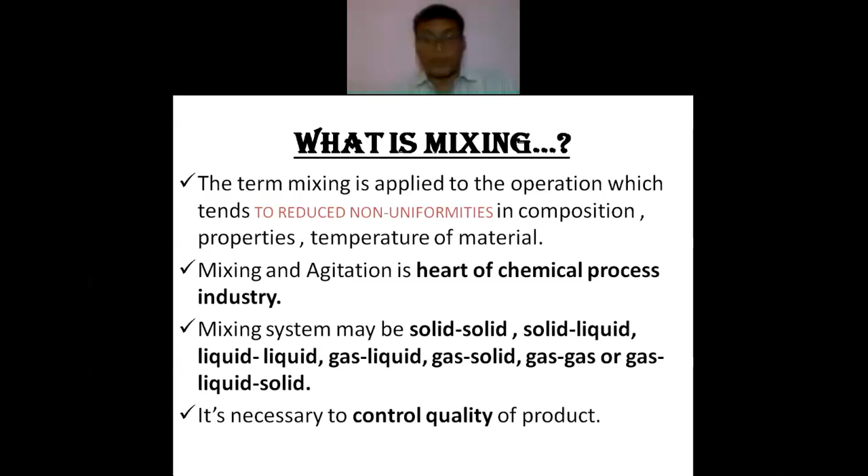Then we add the terminology of agitation to that. Now there is a difference between the mixing and agitation. Mixing is a process, agitation is a means, agitator is a means. An agitator is used to mix the different phases. So mixing is a process. As a result, you get a good uniform mixture. So that is the basic difference between the agitation and the mixing.

Agitation, you require an agitator, and in the process of mixing, once you agitate, you get a mixture. So agitation is a means whereby mixing of phases can be accomplished, and by which mass and heat transfer can be enhanced between the phases or with certain external surfaces.

In its most general sense, the process of mixing is concerned with all combinations of phases, of which the most frequently occurring ones are: the gases and gases, they can be mixed. Gases, when they are mixed into the liquid, that process is called a dispersion. Then the gases with solids, it's a process of fluidization. You make the solids move in a fluid-like motion with the energy supplied with the gases. Then it is also associated with the pneumatic conveying and drying of the solids.

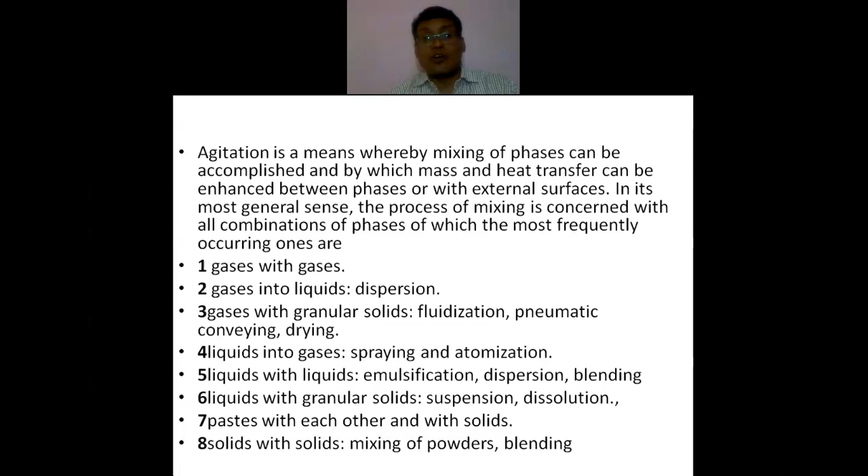Then fifth one, liquid with the liquid, you can form an emulsion, you can do the dispersion, blending. Then liquids with granular solid, it can be the suspension or dissolution. If it's an immiscible solid and liquid, it will form a suspension. And if the solids are soluble into the liquid, it is a dissolution. Then paste with each other and with the solids, a pseudo homogeneous liquid is formed. Then solids with solids, it's a mixing of powder, or it can be the blending of polymers. So these are the different operations which require the processes.

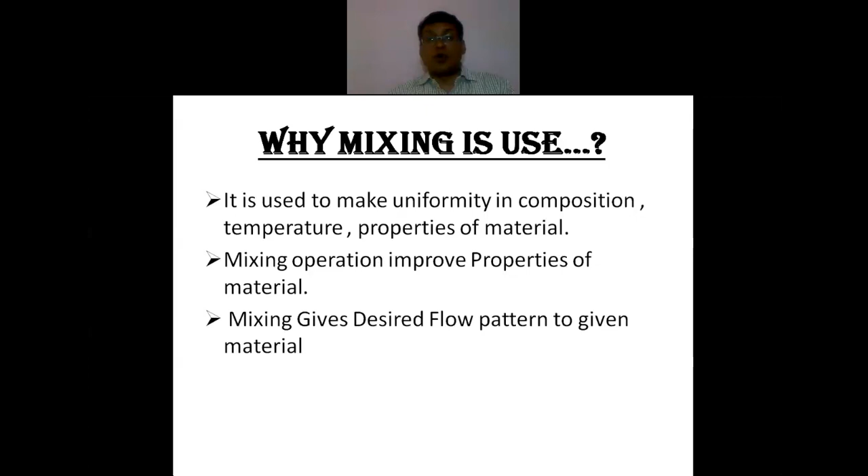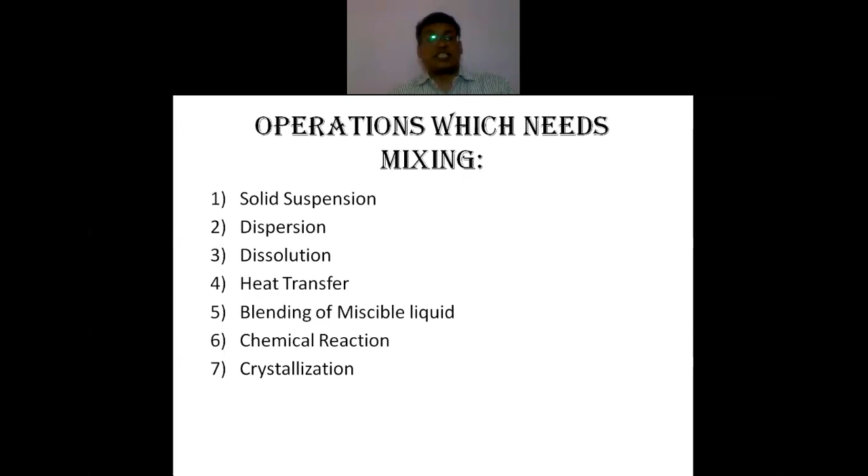Then when mixing is used, it is used to make uniformity in composition, temperature, properties of the material. Mixing operation improves the properties of the material, and mixing gives the desired flow pattern to the materials. So one by one we'll understand these different operations associated with the mixing processes: suspension, dispersion, dissolution, heat transfer, blending, chemical reaction, crystallization. All these require the process of mixing.

So a good mixing system should have the following characteristics. First is the minimum power requirement. Whatever the process of mixing or how efficient that mixing operation should be, that will basically depend on your minimum power requirement. That means it should be the best economically possible.

And when you talk efficient mixing in the optimum time, that means with the minimum time or the desired time, you should get the uniform composition throughout. Efficient mixing means the uniform composition is expected throughout the mixture. Everywhere the concentration will be the same. That means the efficient mixing.

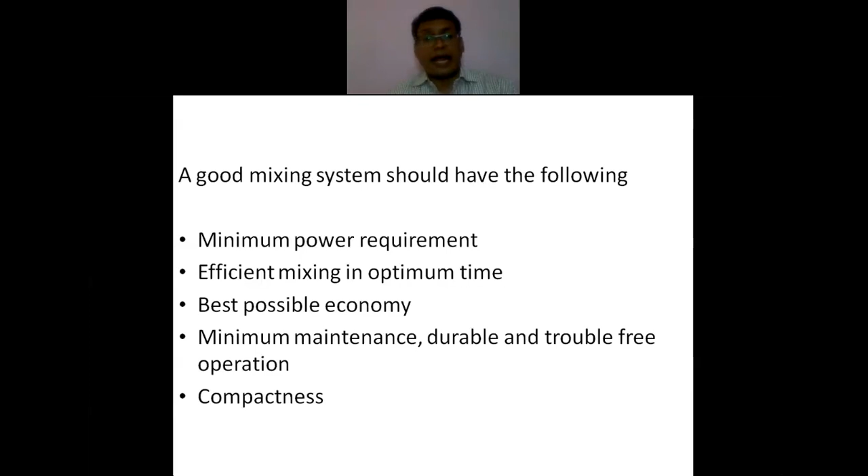The minimum maintenance of all your mechanical parts, then its durability and trouble-free operation. Then the unit should be the compact one. So these are the basic requirements for good mixing. Out of that, this minimum power requirement is talked about everywhere. The rest of the things, that is economy, maintenance, are more or less fixed cost. Minimum power requirement is more focused towards the running cost. And in these mixing operations, the power required is the most important thing to be considered for calculation.

Then the first process is solid suspension. Now it's a physical mixing operation basically, and this involves liquid and solids, but the solids are immiscible in the liquid. That means suspending fine solid particles in a liquid, as in the catalytic hydrogenation of liquid, where solid catalyst particles and hydrogen bubbles are dispersed in the liquid. So this hydrogenation process incorporates the gas, that is the hydrogen bubbles, and solid catalyst particles, nickel, and they are dispersed in the oil. So that is the hydrogenation process that is taking place.

Second example, a slurry of uniform composition having the particles in suspended form is to be prepared. Now you will perform one of the experiments of sedimentation in your solid fluid operation. There you take a calcium carbonate solution. That means the calcium carbonate is dispersed, suspended into the water. First you will stir it with the help of a glass rod to get a uniform slurry, to form a suspension. When you stir with a glass rod, the calcium carbonate will be uniformly distributed into the water to form a slurry. That is nothing but a suspension. And if you keep it for a certain time, it will get settled. That process will be the sedimentation process.

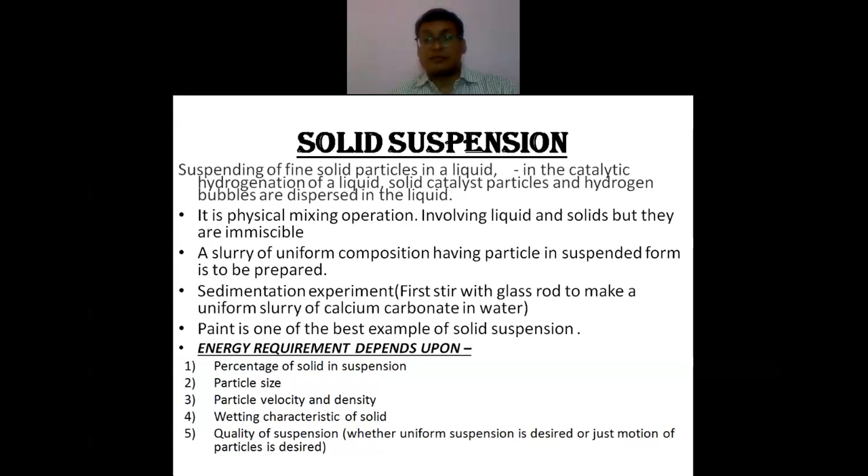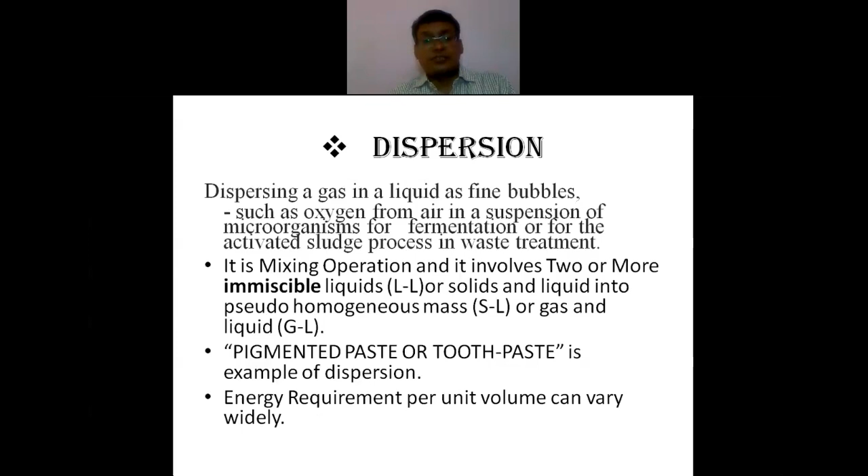Then second, it's a process of dispersion, dispersing a gas in a liquid as fine bubbles. So it can be gas-liquid. It can be a liquid-liquid process also, that means two immiscible liquids. Then it can be solid and liquid, like your toothpaste, pigmented paste. That is the pseudo homogeneous mass that will be formed. Dispersing a gas in a liquid as fine bubbles, such as oxygen from air in a suspension of microorganisms for fermentation or for the activated sludge process in wastewater treatment. The energy requirement per unit volume can vary widely.

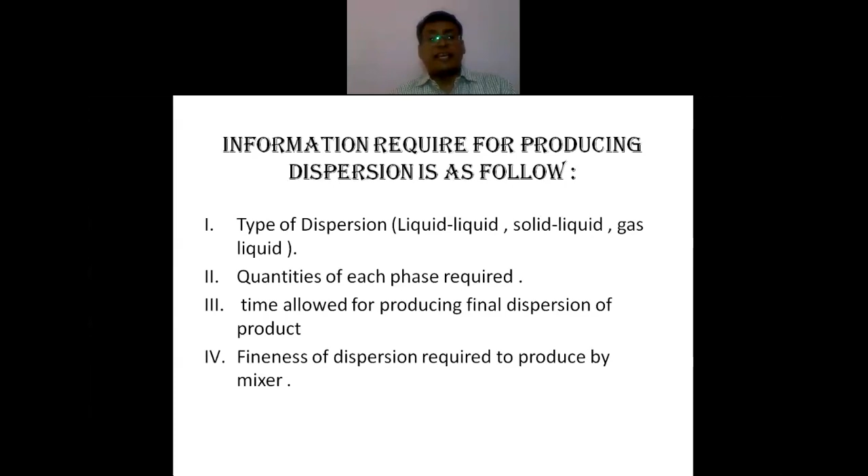Then the information required for producing the dispersion is as follows. The type of dispersion, that is liquid-liquid, solid-liquid or gas-liquid dispersions. Then the quantities of each phase required, the time allowed for producing the final dispersion product, then the fineness of dispersion required to be produced by the mixer. Hydrogenation of oil is the important example of gas-liquid dispersion, or the air bubbles passed into water where the microorganisms are available either for fermentation or for wastewater treatment.

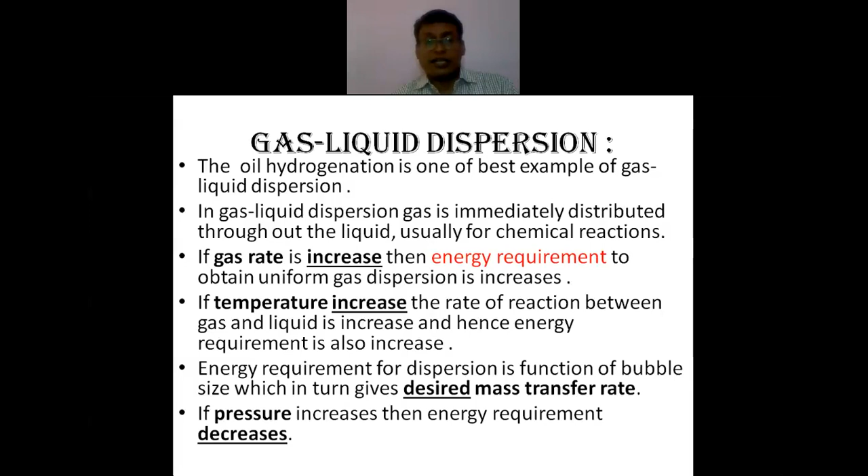Then if you increase the gas rate, the energy requirement for obtaining the uniform dispersion also increases. Similarly, if the temperature increases, the rate of reaction between the gas and liquid increases, and hence the energy requirement also increases. The energy requirement for dispersion is a function of bubble size, which in turn gives the desired mass transfer rate. If pressure increases, then energy requirement decreases. Energy requirement is inversely proportional to pressure. This is a common oil hydrogenation figure.

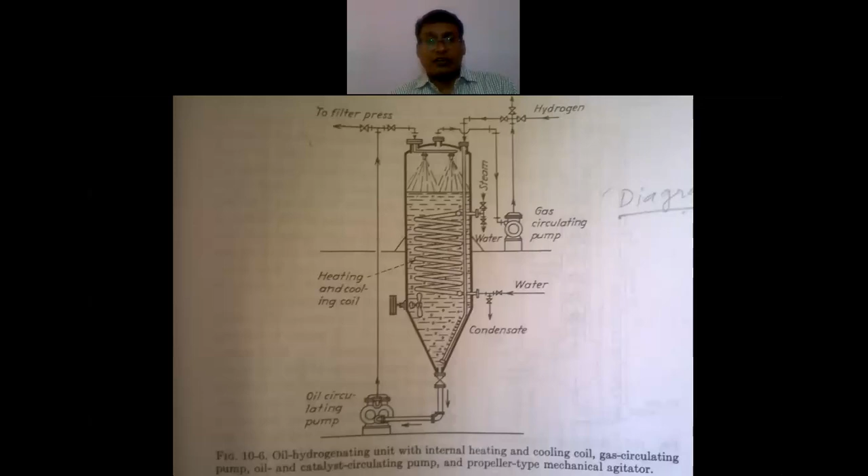Then the process parameters, they are also of concern. The details of vessel dimensions, the reaction rate data, volume being handled in the vessel, then operating pressure and temperatures, then gas volume bubbled per unit time, that is the meter cube per second, then time allowed for the final dispersion product, that is, in this amount of time the final dispersion that is expected.

The energy requirement, general energy requirement for vegetable oil hydrogenation, is around 3 kilowatt per 5 meter cube, and for organic halogenation it is 15 kilowatt per 5 meter cube of volume.

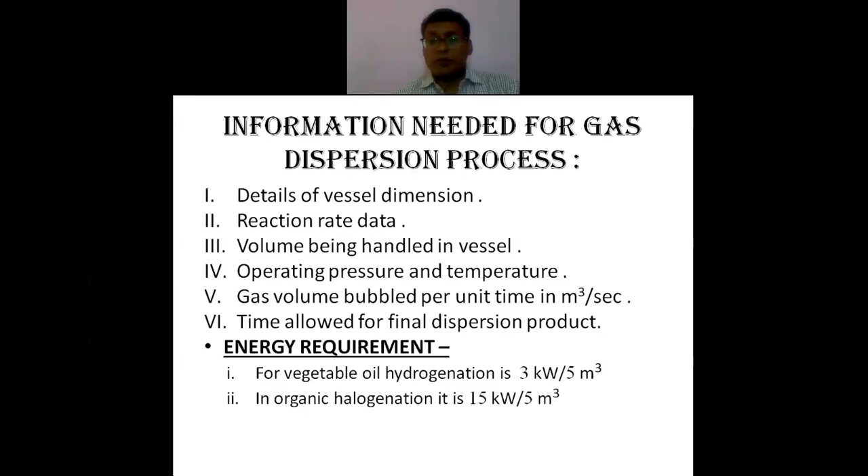Then there is a process of dissolution. This is associated with a miscible solid into the liquid. That means the solid particles plus liquid, the solid particles will get dissolved and you will get a solution. Solids are dissolved in liquid to produce this solution. Hence, good circulation is to be provided around the solid particle. Now, where the role of this agitation or mass transfer comes into the picture from the point of view of chemical engineering is this.

Good circulation is to be provided around the solid particle. That means this solid particle should be continuously exposed to the fresh liquid. This good circulation is to be provided around the solid particle, so that the fresh liquid and the solid surface will come in close contact. That is why we are trying to move the liquid in this process, so that the interfacial contact area will be good.

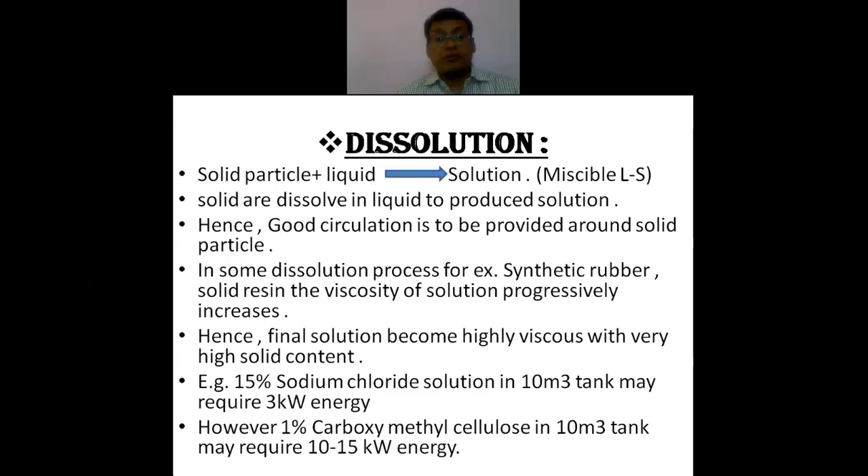In some dissolution processes, for example synthetic rubber, solid resin, the viscosity of solution progressively increases. Hence, the final solution becomes highly viscous with very high solid contents. So, for example, the sodium chloride solution in a 10 meter cube tank may require 3 kilowatt of energy. However, 1% carboxymethyl cellulose, that is CMC, in a 10 meter cube tank may require 10 to 15 kilowatts of energy. That means it depends on the solid. CMC forms a viscous solution, and that is why you require much higher energy as compared to sodium chloride.

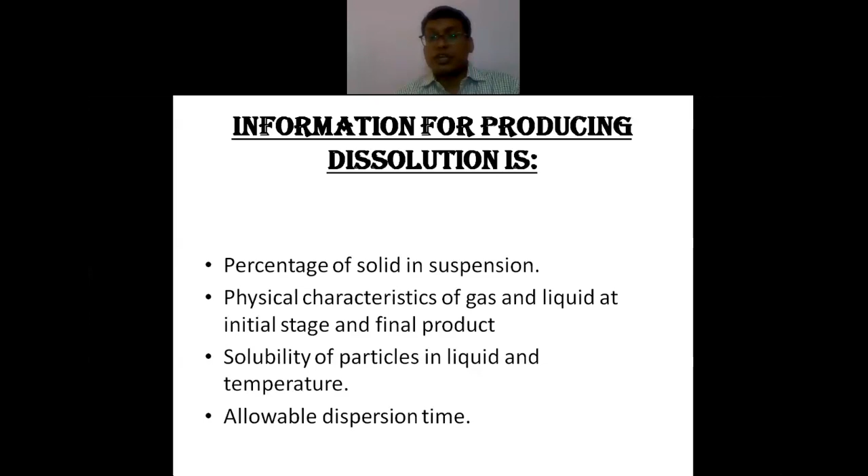Then the information for producing the dissolution: the percentage of solid in suspension, then the physical characteristics of gas and liquid at initial stage and final product, then solubility of particle in liquid and its temperature, then allowable dispersion time. First it has to be dispersed, then it will dissolve. When dissolution is associated with solid particles, first dispersion takes place and then dissolution takes place.

Then the process of crystallization. In the process of crystallization, agitation mixing system selection is done according to the heat transfer application, necessitating the good flow of solution past the heat transfer surfaces.

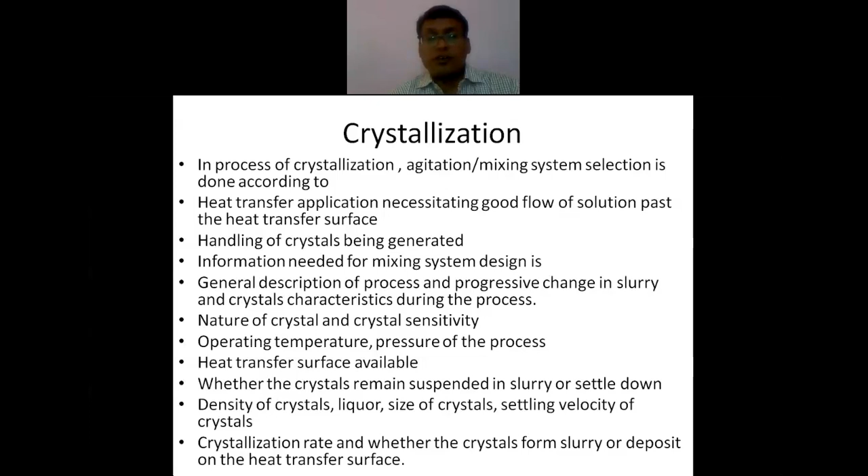You must have performed certain experiments in your inorganic lab so that you get certain crystals. In that, you stir the solution and allow certain nuclei or crystals to develop. You go on continuing the stirring so that you will get good quality crystals. So to get good quality crystals, one has to take the important consideration of agitation. Then and only then you will get good quality crystals. A certain flow direction is required to get good crystals.

Then it is also required the heat transfer surfaces. The rate of heat transfer depends on the mixing pattern, the rate of surface renewal at the heat transfer surfaces, then agitation of the fluid to increase the heat transfer between the solid and a coil or jacket in the vessel wall. So the process of agitation increases the heat transfer. Because of the turbulence created by agitation, motion is given to the fluid particles and they start moving. Once they move, every time they come in contact with fresh liquid, and that increases the heat transfer.

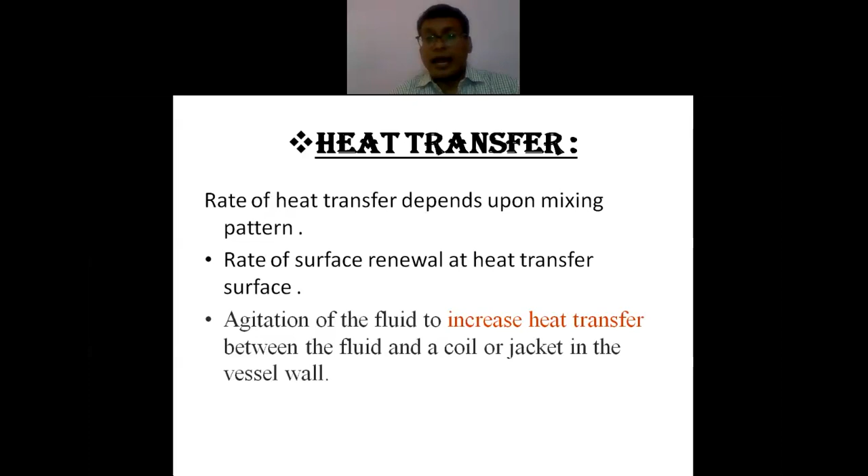Then the process of blending of miscible liquids. Again, it's a simple physical mixing operation without any chemical reaction. Blending doesn't involve chemical reaction. Blending of two miscible liquids such as ethyl alcohol and water, or kerosene blended in petrol, or kerosene blended in diesel.

Sometimes it's a fresh polymer that is blended with a recyclable polymer, or glycerin is blended in water. The change in the physical properties observed, the composition of blend needed, and the time allowed to obtain the final blend has considerable effect on energy requirement. The time required for one turnover depends on whether the components are readily miscible or have widely different properties.

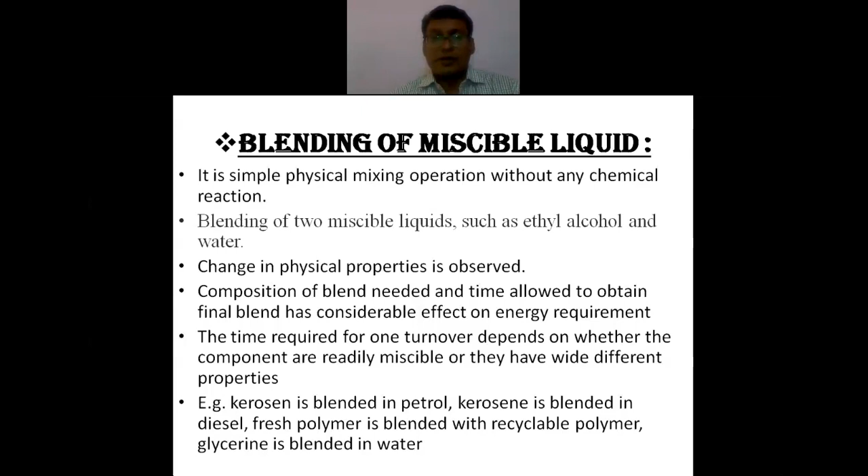Then again, the chemical reaction - this is the most important part associated with our chemical industries. The rate of chemical reaction is influenced by mixing in the vessel, how the different phases come in contact with each other, so that you get higher rates of chemical reaction, and you get the desired product in minimum time. Rate factor is very important for our chemical reactions.

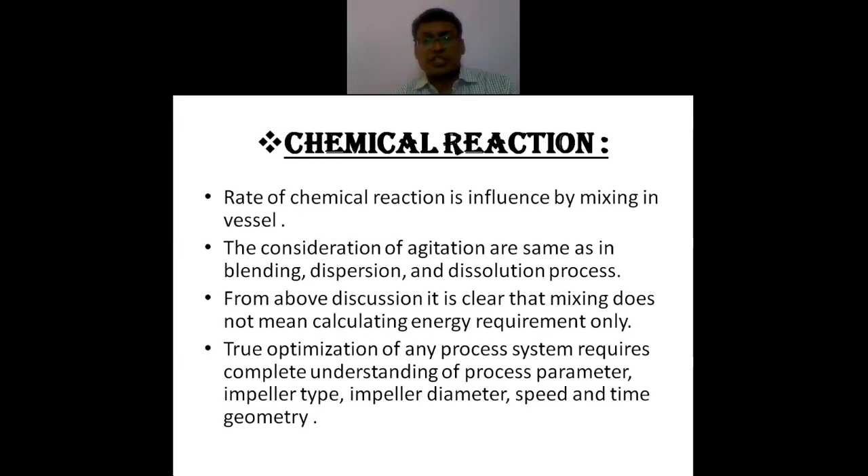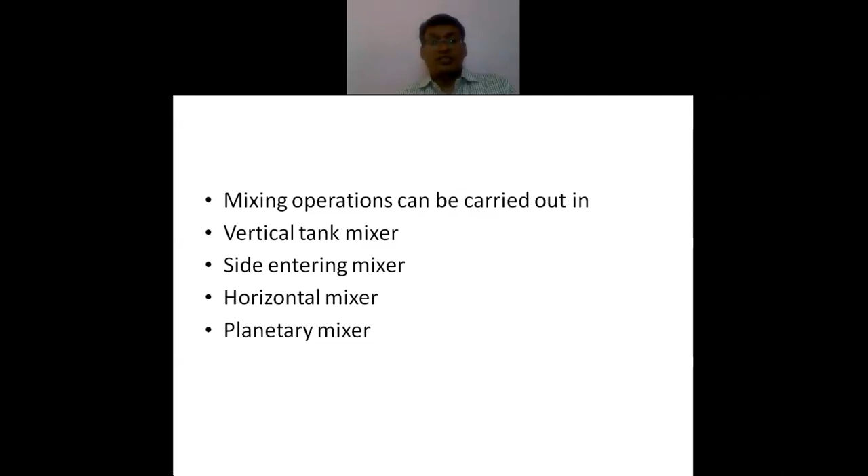The considerations of agitation are the same as in blending, dispersion, and dissolution processes. So these are the different operations we have talked about. But these mixing operations can be carried out in different ways - for example, in a vertical tank mixer, side entering mixer, horizontal mixers, planetary mixers. These are the different processes.

In addition, there are different kinds of mixing processes existing, such as mechanical mixers. This is like concrete mixing - concrete is produced from sand, gravels, cement and water. So there you are rotating the whole tank - that is a mixer, like a concrete mixer.

Then there are certain static mixers. Static means the mixer itself is stationary. So in a pipe that is fitted with certain internal baffles, like a helical structure - when the helical structure is available inside a pipe, the flow gets a certain rotary direction, and in that rotary direction the process of mixing takes place. So these static mixers are pipe mixers.

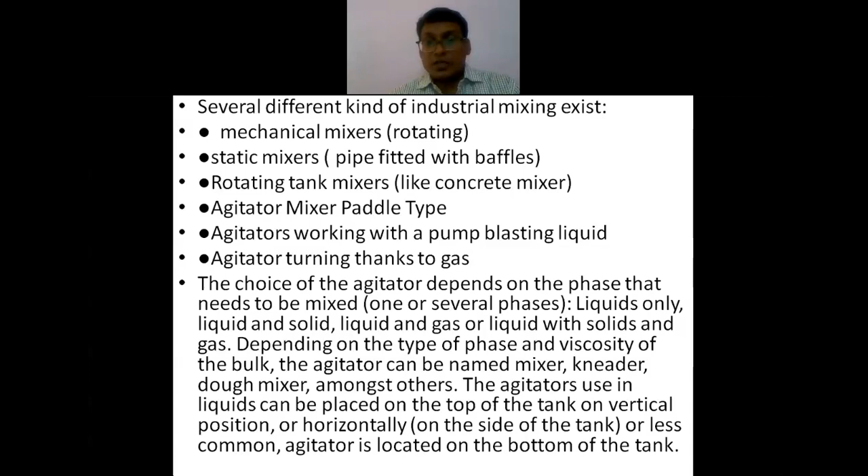So the mechanical mixer, static mixer, rotating tank mixer, then agitator mixers - this is of our concern. Agitators working with the pump, agitator turning thanks to gas. So looking at these figures...

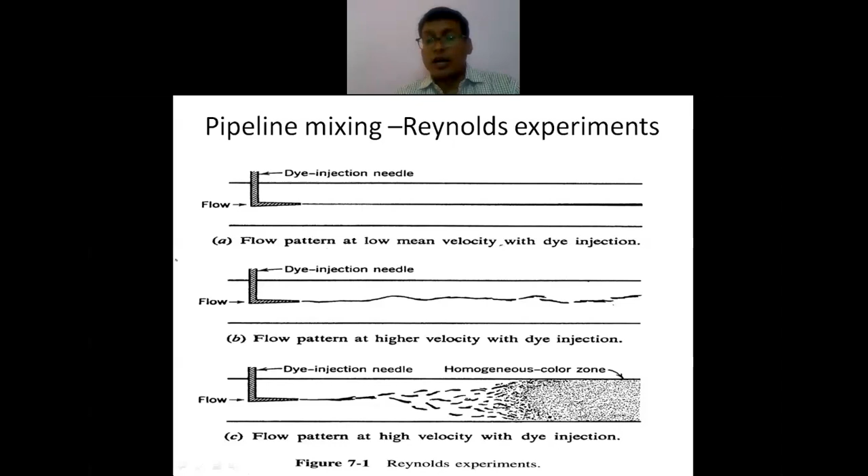Again here also the hydraulic mixing is taking place. That means a pipe is there, and through another pipe or through a capillary you are injecting a dye. So there is a flow available and you are injecting a dye. After a certain distance you will get a uniform homogeneous color zone - that is what a Reynolds experiment is. This is also hydraulic mixing, but in the general case of hydraulic mixing, a pump is used and the same fluid is incorporated in a tank.

Now, what basically does the agitator system consist of? The agitators are machines used in industries for mixing liquids together. The purpose of agitators is mixing - to mix, and this promotes the reaction of chemical substances. Why are we doing it? To promote the reaction of chemical substances, keep the homogeneous liquid bulk during storage, and increase heat transfer.

In other words, agitation refers to forcing a fluid by mechanical means. This mechanical means is nothing but an agitator. Mechanical means can be the rotation of a tank itself, the pumping of a fluid, or the compressing of air.

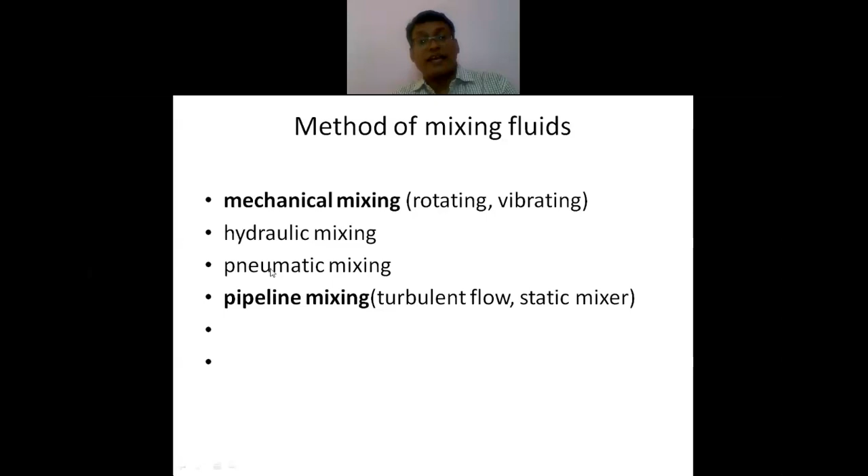Pneumatic means is by compressing the air and conveying the solids. Here compressing the air and passing it through the liquid, or in case of fluidization, it can be passing through the solids.

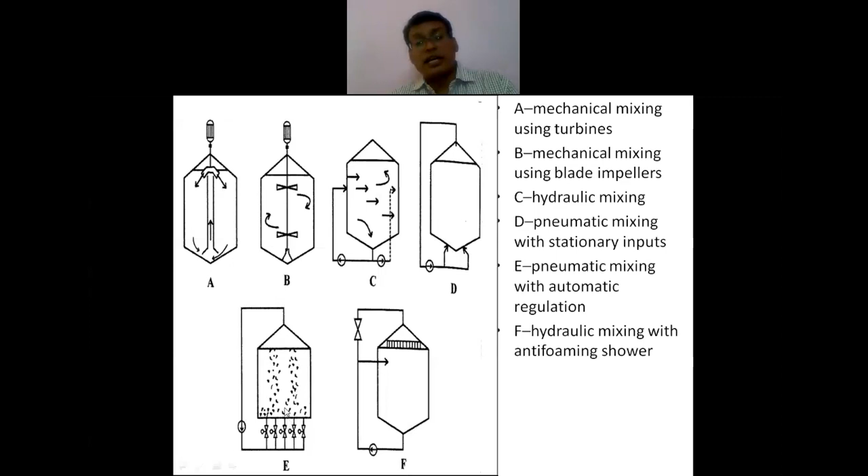So these are the different ways by which mechanical mixing is done, when the mechanical mixing is with the help of agitators, it is called the process of agitation. Mixing is a wide terminology.

The process of mixing is achieved with the help of different techniques: rotating tank, agitator, then compressors or pumps, and out of that one is your agitator.

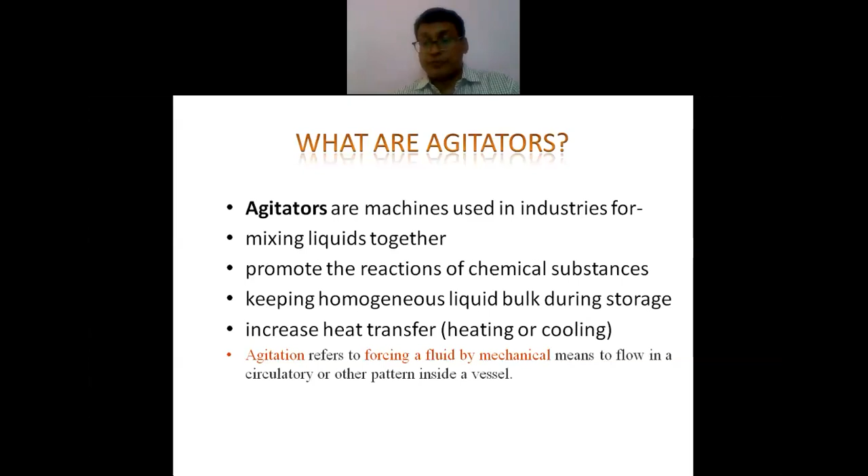So agitation, it's an action, putting into motion by shaking or stirring, often to achieve mixing, bringing stirring or disturbance of a liquid. The techniques mostly involve agitation by stirring, meaning agitators are generally stirred.

The agitation gives a rotary action. Agitators are given the rotary action so that the fluid will be stirred, and turbulence will be created into the liquid phase. The agitation is achieved by generating the movement of the liquid phase, and there the impeller comes into the picture.

So this, the agitation, is due to the mechanical agitators, due to the rotation of an impeller.

The bulk can be composed of different substances, and the aim of the operation is to blend it or to improve the efficiency of a reaction by better contact between reactive products, or the bulk is already blended and the aim of agitation is to increase heat transfer or to maintain particles in suspension to avoid any deposits.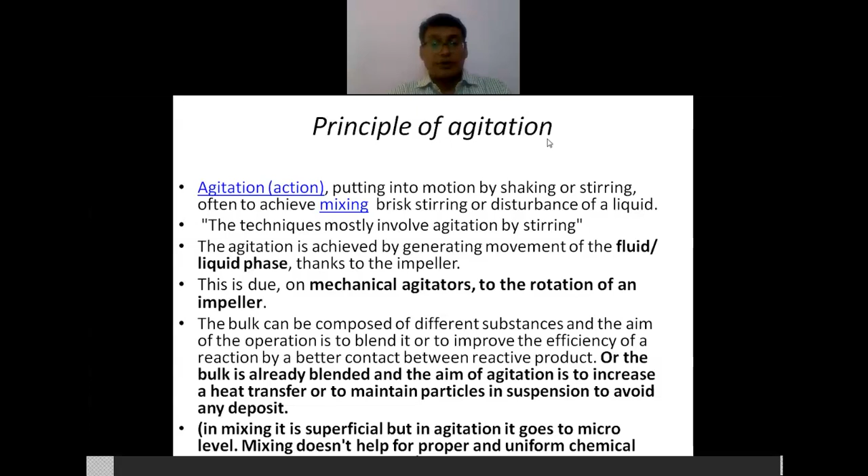The agitation of liquid is made by one or several agitation impellers. Depending on its shape, the impellers can generate the movement of the liquid, which is characterized by its velocity and direction.

The turbulence is an erratic variation in the space and time of local fluid velocity, a chaotic condition that is generated, the erratic behavior of the fluid that is observed. Then shearing is given by the velocity gradient between the two layers of the fluid.

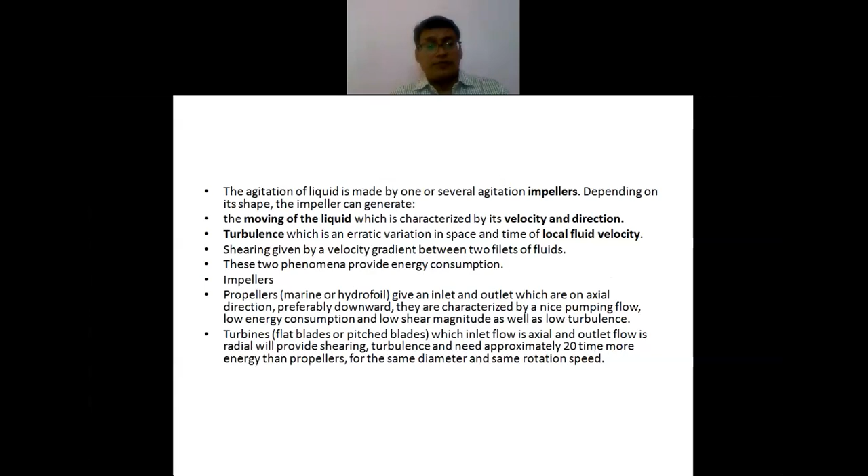These two phenomena provide the energy consumption. Now there are mechanical features of the agitators. Look at this figure first.

Once the fluid is moved, it will have a certain rotary action, and different velocities at different layers will be available. So a velocity gradient inside the vessel is also observed, and because of that, turbulence is created and mixing takes place.

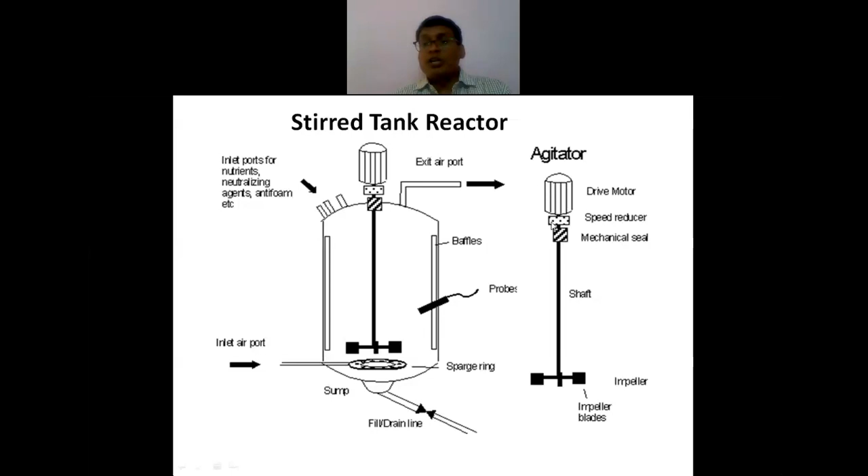An agitator is composed of a drive device, that is primarily a motor, then gear reducer, and sometimes belts, coupling or transmission, a guiding system of the shaft, then the seal, mechanical seal, then support and mountings on which the motor is supported. Certain supports or platforms are fabricated or welded on the vessel to mount the motor and hold the shaft at the proper position.

Then the shaft and the impeller. If the operating conditions are under high pressure or high temperature, the agitator must be equipped with a sealing system to prevent leakages, vapor leakages, to keep the inside of the tank tightened where the shaft crosses it. If the shaft is long, it can also sometimes be guided by a bearing located at the bottom of the tank.

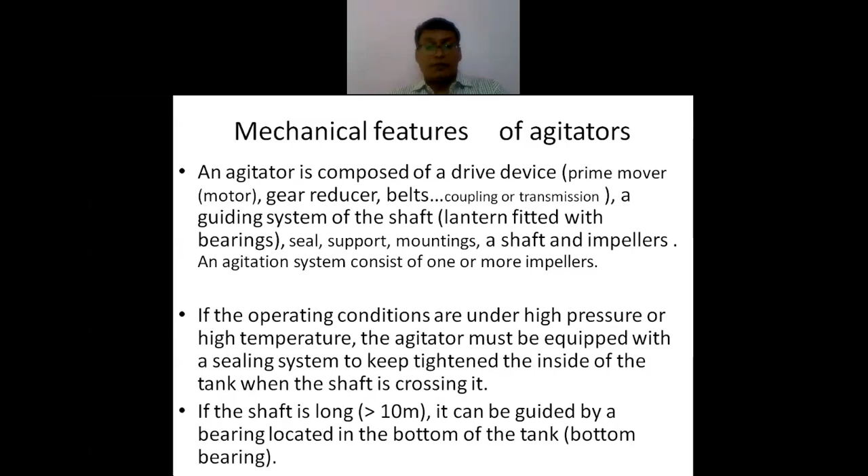The various parameters of basic equipment useful for agitation system design. For agitator system design, one has to consider different parameters.

The ratio of liquid depth to the vessel diameter can be between 0.5 to 1.5. Generally it is 1. This is the L by D ratio, length to diameter ratio. Then liquid depth.

It indicates the cylindrical height in the case of a flat bottom vessel. If the vessel has a dish bottom, then the distance up to the center of the dish is considered as the liquid depth.

If coils are provided in the vessel for heating or cooling purposes, then their pitch should not be too close.

If baffles are provided for better mixing and to promote turbulence, they should be welded to the vessel wall in case of low viscosity vessel liquids, and some clearance should be maintained within the vessel wall in case of high viscosity liquids. That means when providing baffles, if it is a low viscous liquid, there is no necessity of providing clearance. But if it's a viscous liquid, then there is a necessity of providing clearance between the pressure vessel shell and the baffle, so that the viscous liquid can move through this gap.

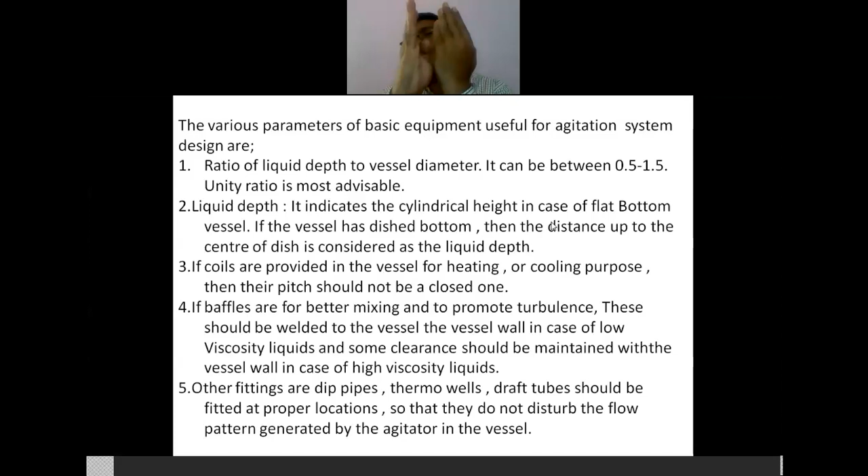The baffles are for better mixing and to promote turbulence. They should be welded to the vessel wall in case of low viscosity liquid, and some clearance should be maintained within the vessel wall in case of high viscosity liquids.

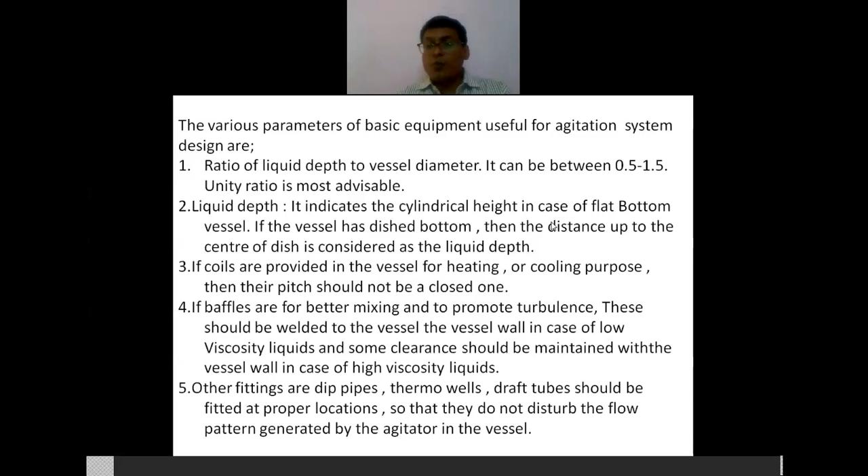Other fittings in a vessel such as dip pipes, thermowells, and draft tubes should be fitted at the proper location so that they do not disturb the flow pattern generated by the agitator in the vessel. This flow pattern is also very important to get the desired rate of reaction. This generated flow pattern plays a very important role.

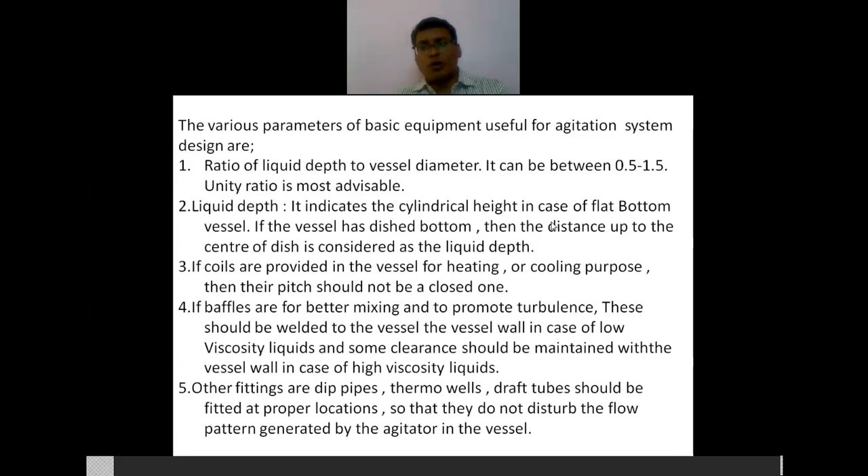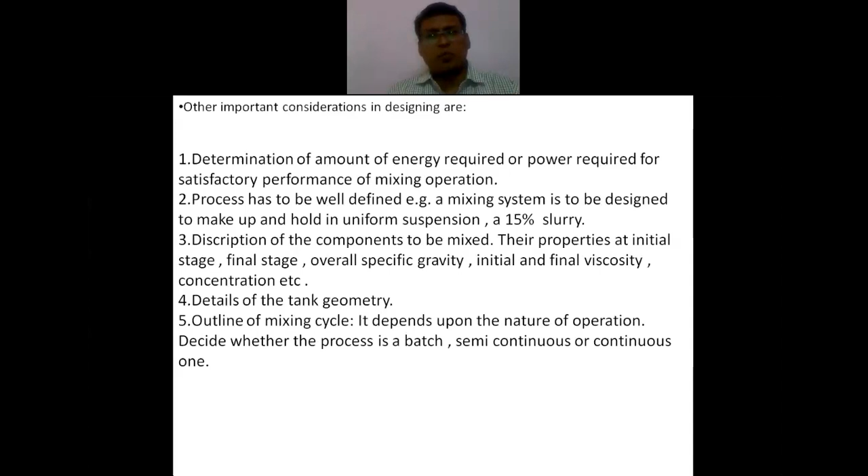So this is what is related.